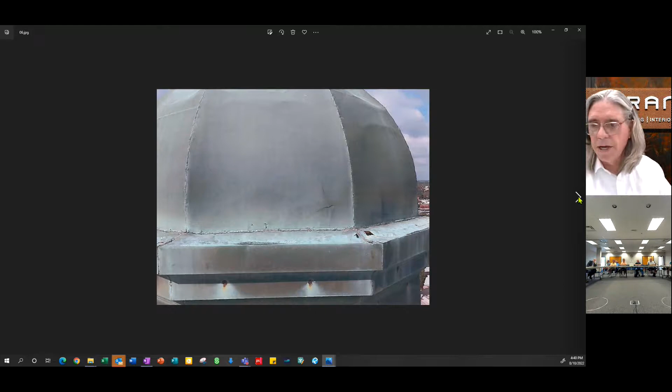So I'd like to start at the top and work our way down on the building. This is at the dome of the lantern on top of the dome. So just below the flagpole, you can see the condition of the copper, how beat up it is. We have tears in the copper, some holes.

We are losing caps over the fasteners, and the fasteners on here are ferrous metal, and so they corrode when exposed, and because they're in contact with the copper. Seams are also starting to pop in a number of locations.

At the base of this dome, you can see how the flagpole is rigged. The cables rub on the dome itself. And then at some point, a stainless steel piece of flashing was applied over the copper to protect it from the rubbing of the cords.

Now, please make note that this building did not have a flagpole when it was originally built. And at some point, the lantern on top of the courthouse was redesigned and replaced and a flagpole added.

Here's some of the accommodations for how the rigging for the flagpole is held in place. It's exposed to the elements. It's been wearing out. They have to tie it off to the railings on the lantern here.

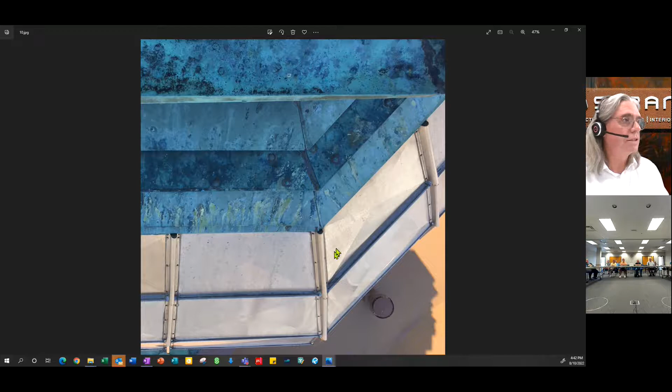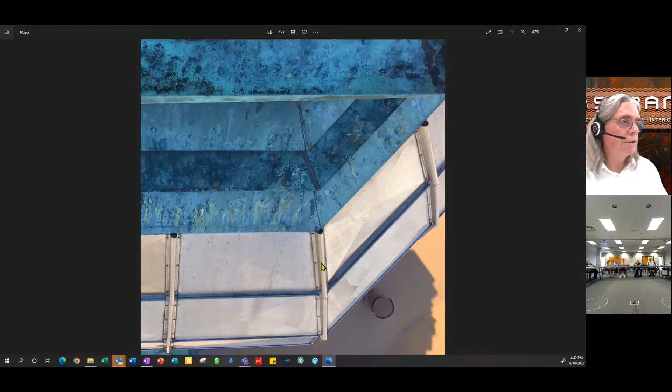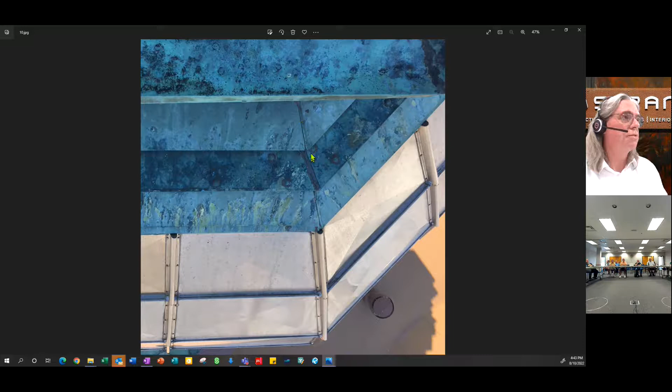Looking down from the lantern onto the stainless steel, you can see the tops of these ribs are open. So any runoff coming through can flow into this. And the attempt is to try and drain it down and out. We can't be positive with that, and you'll see some of the damage going on. We have solder joints that are wearing out and cracking on the copper.

This is a corner piece here at the base of the dome, and you have a flat roof on here that is copper clad. Again, seams are starting to go on here. They're starting to crack, and there's some movement now. This is a replacement for what was the original spheres that were on the courthouse when it was originally designed.

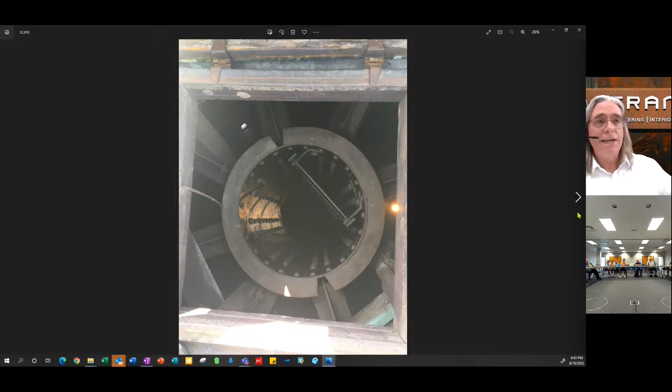I want to take you down into the dome now. So starting up in the lantern, this is what you have to climb down through. You have a ladder that takes you up, but the ladder stops about 2 feet short of the deck. And again, please remember, originally there was no need to get up here. And when they redesigned it and added the flagpole, this became important. This was added probably as an afterthought.

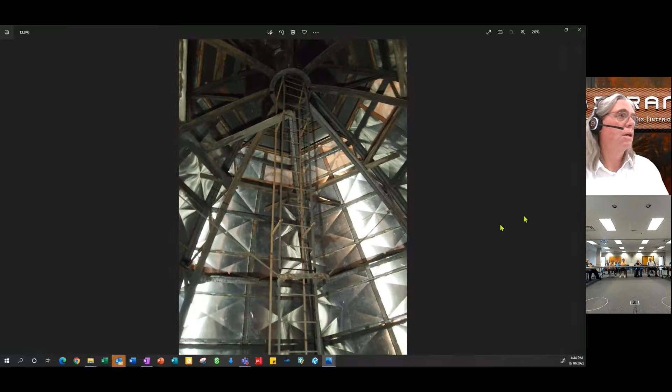The inside of the dome, we were seeing a lot of corrosion going on in here. Now, some of it is definitely attributed to leaks. A lot of it is also attributed to humidity. This is untempered space. And so when you get a breeze coming off the lake, you're going to get a temperature drop. You're going to get condensation occurring on the steel. After 120 years, the steel primer that was originally on here is wearing thin and some corrosion is taking place.

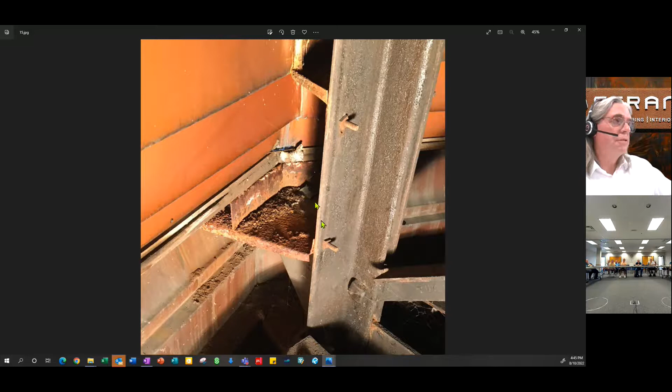Here's at the base of the dome. This is the copper below the stainless steel, and this is some of the armature holding the copper in place. In several locations, this sheet metal has already corroded out. We think this may be from about the 1950s during the repairs and that they had used galvanized steel in here. Regardless, it's corroding and needs to be replaced.

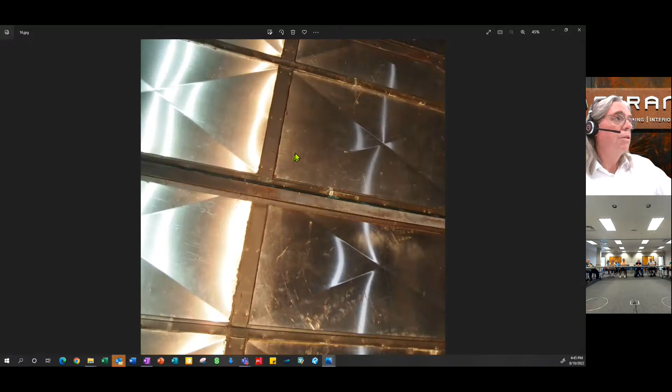This is what the inside of the dome looks like at the stainless steel panels. Originally, each panel represented a large piece of glass. When they removed the glass, they put in the stainless steel and they drilled through all the armature to bolt the stainless steel in place. We've seen instances where there is some leakage, water getting in, whether it is backing up underneath the shingling or if it's coming through at those ribs in between the panels.

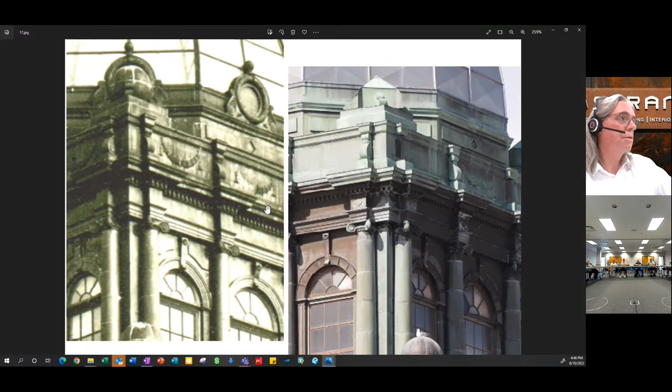I just wanted to quickly show you a comparison. This is approximately 1915, maybe 1920, and this is today. A lot of the ornamentation is gone. This is the sphere on the corner that has been replaced by a small box. There were ornaments on each side of the dome that have been replaced.

I believe that from about this level up is replacement in 1950. It doesn't quite match the construction of what's below. You can also see that a lot of the ornamentation down below has been changed. Here's the original window arches and brackets. They've been swapped out. Again, I think this may have been the result of the 1950 storm damage.

Looking at the columns, you can see that on here, over here, and here, all the seams are beginning to open up. This is all soldered together. This is a natural hook joint, meaning that this piece slips over this piece and they're meant to move. Hence the idea of having a slip joint there. Water doesn't get up into it, but something like this, it's not the same. This should be sealed tight.

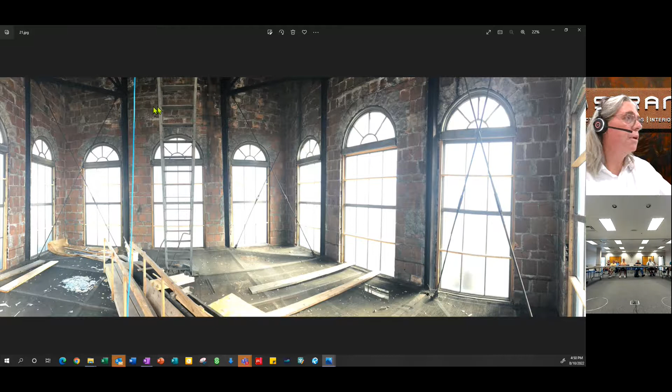There's a lot of efflorescence going on. There is a lot of soot. You can see various repairs have gone on, particularly on the window arches and up towards the top here. This is the ship's ladder going up to the dome. Originally, the dome was open all the way down. When they clad the dome in stainless steel, they also added this floor in the dome. And this floor has a roof on it. It's actually in good shape, but it is about 70 years old now.

Looking up towards the top of the walls is where we start having a lot of concern. Water damage in the past, a lot of efflorescence. Now, this is underneath where the spheres were that were replaced with those copper boxes. So as seams have started to split, water has been getting in, and you can see some efflorescence. Things have been repaired over time. Some of the steel is darker than other pieces because that has been painted over time to keep up the coating.

Over here, this is one of the trusses up in the dome coming down, meeting a column. And this is the condition of it. You can see here that the truss appears fine, but the column itself, which is embedded in the book tile walls, is rusting. Now, we could not get up close to this. I can't tell you how bad the corrosion is. Is it just surface corrosion or is it much worse? But you can see all the water damage that has gone on to the book tile around here.

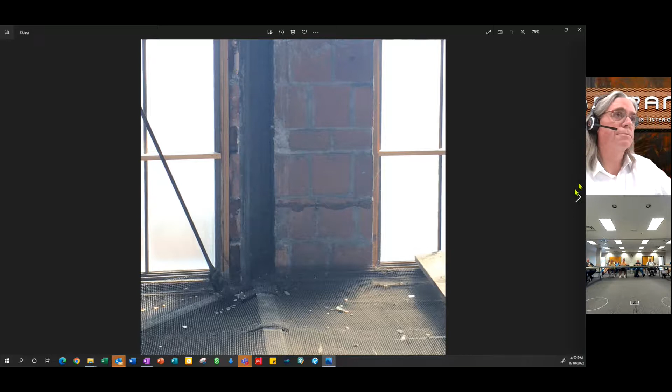As we come down towards the bottom again here, the windows, and you can see additional wood bracing has been added behind the windows to reduce the chance of more sash being broken. But you can also see in here that clay tile over time has either broken out or it was removed when these windows were replaced and 2x4 framing was put in. This is just a close-up of the interior side of the original windows and how they fit in there. And again, you can see the arches have been taken care of over time.

What we have noticed is that a number of the louver fins are stuck in position and really need to be cleaned, fixed, or replaced. Over the years, we've had efflorescence appear on the walls. So these walls are seeing some moisture. And so that's the tower itself.

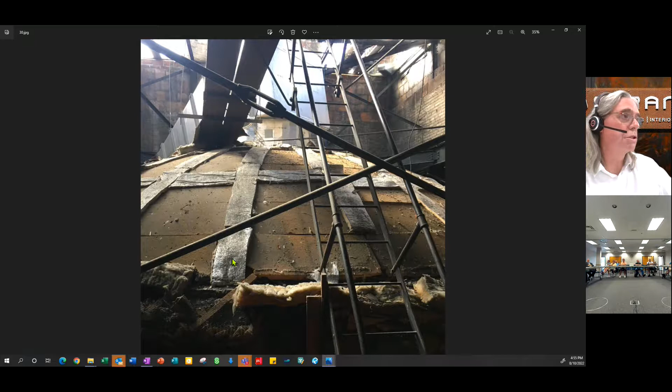This is where the glass would have originally sat. Looked at the condition of the steel. By and large, it's in good condition. However, we did notice there's moisture, whether it is water or humidity coming through. It is damaging the plaster below the ring. You can't really see this from down below. You had to open up a panel to see it. And here's a close-up shot of one right next to the opening. So the plaster is deteriorating due to moisture.

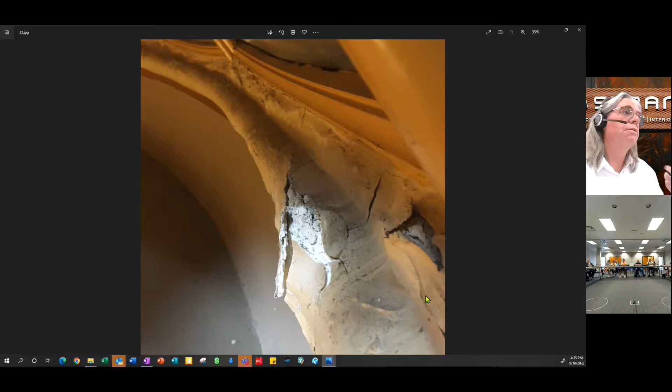Also, when the window replacement was done in the 70s, those of us old enough to remember the energy embargo, at that time it became popular to lower ceilings in buildings so that you did not have to heat or cool as much space. And that's what happened here. The ceilings were dropped. The original transom windows were infilled with a metal panel.

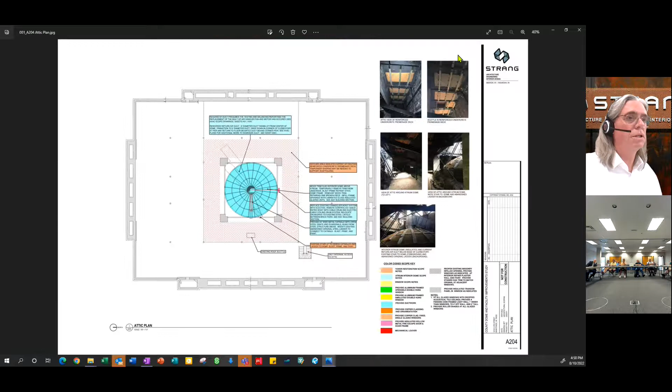What I'd like to show you now is our scope drawings very quickly. What we put together, and this is listed in our report, this is how they developed their estimates. We came in, identified the issues, and we started putting together here's the recommendation, and these are the items you need to do in order to achieve that recommendation.

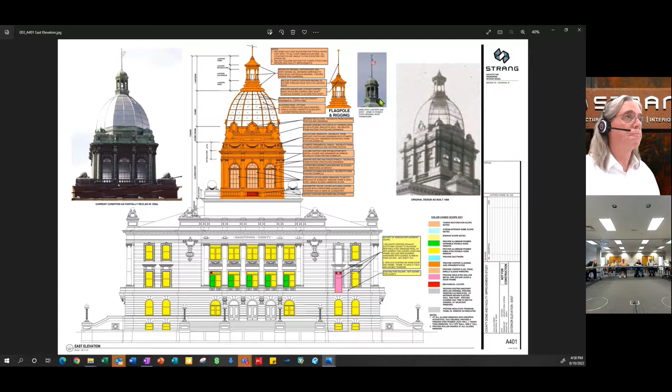For the tower, it was looking at completely recladding, and here's a comparison of the original top and the current top, current lantern up there. The windows, we went through and developed a matrix of how the windows should go back to match what they originally were, with the idea of creating an interior light well on the inside so that you're getting more natural light into the building.

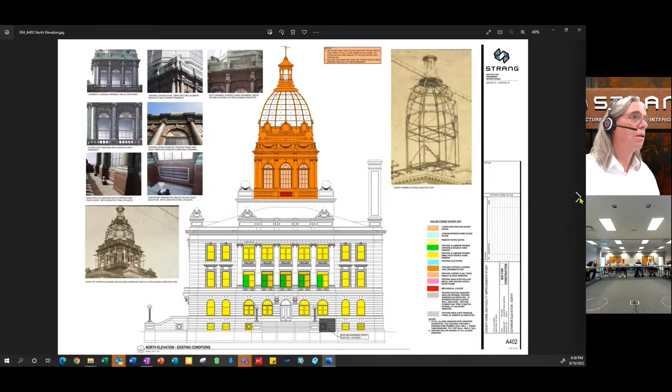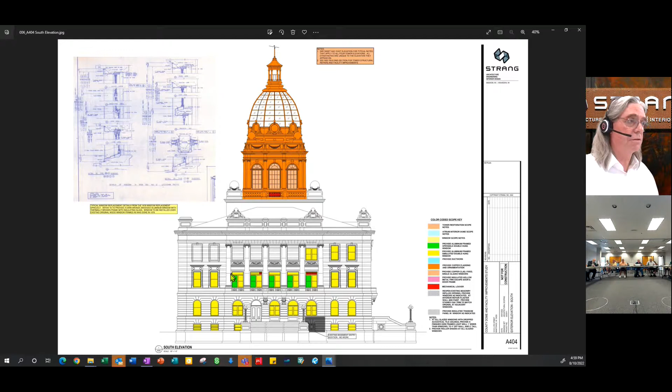We also included details from the window replacement in the 70s there to help inform, this is how the windows were installed. This is what you can expect to find when you take the windows out and replace them. Ironically, the original frames are still in place in here. They're underneath the aluminum.

Then looking at the dome, we came through and recommended, if you were to restore the dome, opening it up and returning the glass, things that would need to be done, such as relocating part of the mechanical system that uses the center grill as a return air. And we threw in an alternate in here. If you're going to go this far, would you consider reactivating the lighting here?

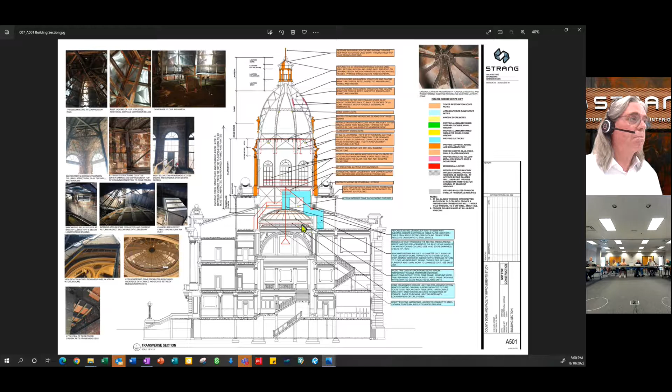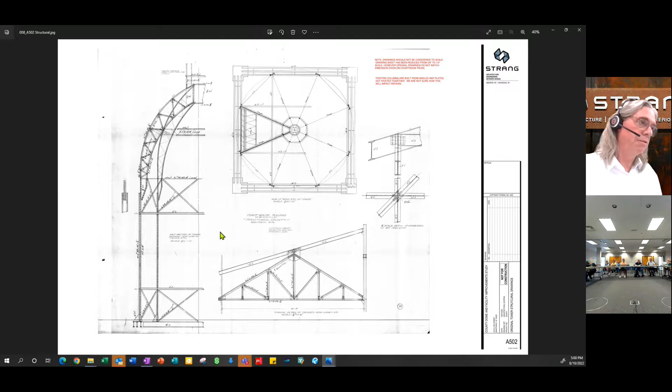And rather than having incandescent lights in porcelain lamps, which is what's there now, to go with a fiber optic system. That means you don't have to send a ladder up to change a lamp in here, because it's a fiber optic cable and the light is actually up in the attic. Again, we were able to consult some of the original construction drawings. We did not have the shop drawings. So this exhibits design intent, not necessarily what was built, but from what we can see, it appears fairly faithful.

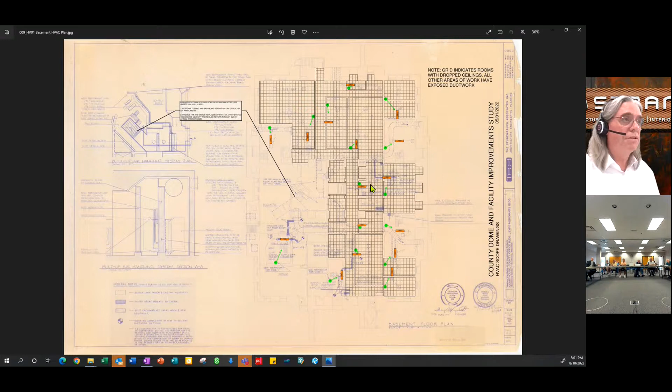Then the two mechanical projects, what we did was we went through, figured out locations and the number of VAV boxes and thermostats that would need to be replaced so that there was an accurate count. Located where we have drop ceilings so that you're looking at either replacing the ceilings or removing a portion of them to do the work and then put the tile back. And we did that for all floors of the building.

Then the final project was looking at the air handling unit in the main courtroom. The current system is at its natural expectancy, and it's time for replacement. It's able to handle 2 different zones. The issue being zone 1 is 1.5 to 2 times the size of all these smaller zones. So it really doesn't work as efficiently as it should. You're always going to be a little too warm or a little too cool in here versus out here.

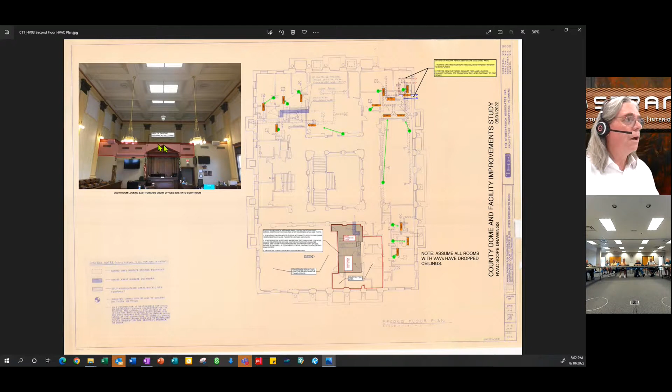And so we made some recommendations of replacing the single unit with 2 units, one that will be subdivided amongst these spaces for each of these zones in the offices, and another one that is solely dedicated to the courtroom, all to be hidden up where the existing are, back behind this wall.

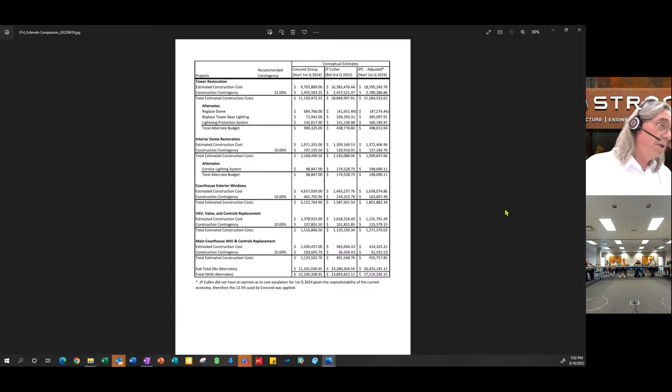So from there, we have the cost estimate, and I won't go into specific numbers, but what I will point out is the columns here. So the first column is Concord Group, again, first quarter 2024. Then JP Cullen, as if we were bidding it and building it this year yet. Then we applied an adjustment to JP Cullen's number for first quarter 2024. That adjustment is the adjustment that the Concord Group used to develop their numbers, and they're projecting a 13.5% inflation rate between now and the first quarter of 2024 if all things remain as they are.

We have some very different numbers on here. And again, the idea was we're looking at it from 2 different points of view. One from a general contractor who's been through it before, who brings the concern about how am I getting to that space? What am I going to find? You're loosely defining this by saying repair it, versus the Concord Group, which is looking at it based on projects they've done. Just, oh, this meets this criteria. This is what you typically find. These are the costs we've been getting this season. And these are the projection rates that we see, the inflation rates that we see coming up.

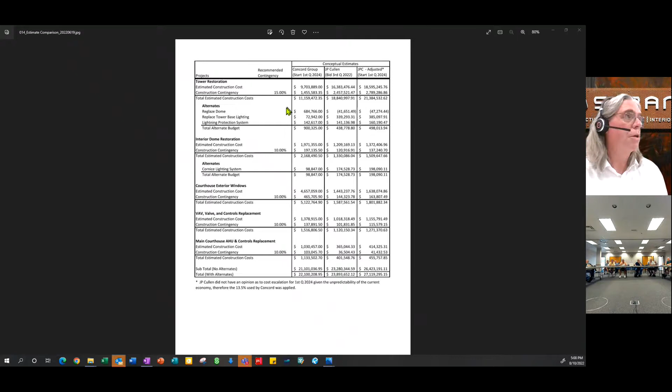Projects of this nature, do they have a typical percent overrun that they have historical information on? Right. What we have done is we've put in a construction contingency. There is a contingency built into these numbers. That is the contractor's individual contingency. It's to cover things they don't know about, because there are no construction drawings or specifications to build off of. They are allowing a contingency in their number. But what we come in with is a construction contingency over the top. And this is for found conditions.

This is for saying, project's been awarded, but we think you need to have 15% on the side to cover items such as, oh, this is worse than was thought, or we opened this up and it doesn't match the opening over here and it has different conditions. So on strict restoration projects, I always recommend a minimum of 15%. General construction is about 10%. When we get to the interior dome restoration, because that's so limited and relatively exposed, we now know how this thing's put together. We only set about a 10% contingency there. And for the windows and the two mechanical projects, we just applied a 10% contingency,

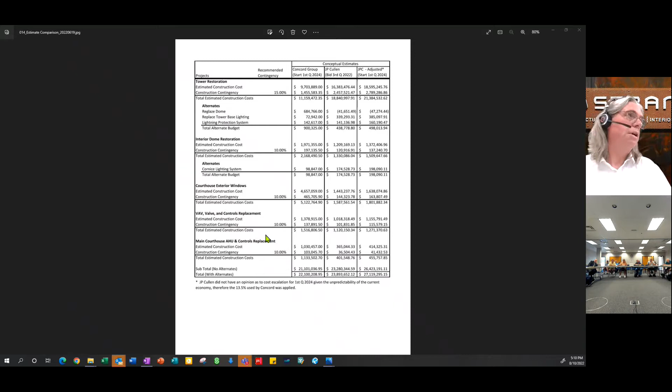the standard 10%. Yeah, I guess my question goes into the companies that are putting these estimates together. Do they have history of projects similar to this? Yes. What the actual guesses were and what the final monetary was? Right. They're using their knowledge, their experience of where things are coming in, to say 10% or 15% contingency. Concord Group originally had a 10%. They just applied a standard 10% contingency to everything. JP Cullen, in talking with them, have the 15% handy, because again, you don't know what you're going to run into.

Supervisor Drill. What was the estimated time frame for the whole project? Okay, this was approached as if these were basically individual projects, because in reality, you can do the two mechanical projects individually, independent of anything else. The window replacement can be done independent of anything else.

There is an advantage to doing the interior dome with the tower. The tower is the one that is going to be the long haul project. That one's going to be a 2-year project. That is 2 construction seasons. You think about the process here of what gets done on that.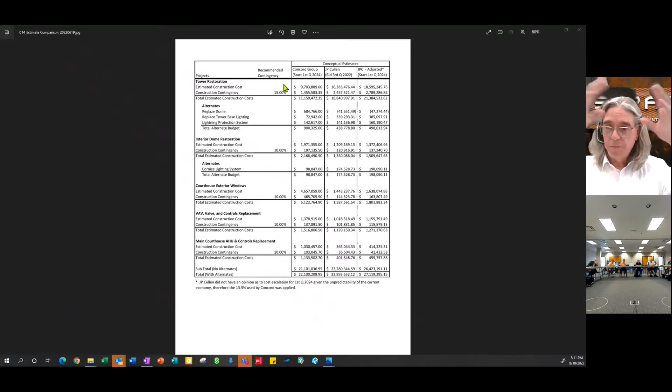First off, you have to peel the copper away, and as you're doing it, you have to document shapes and sizes so that you know how to put stuff back and what size it needs to be. That is then sent off to someone who's going to fabricate the copper. You then come in and you're dealing with the structural repair of the tower itself, the dome, and of the clerestory portion. Then you can come back and start putting the copper back on.

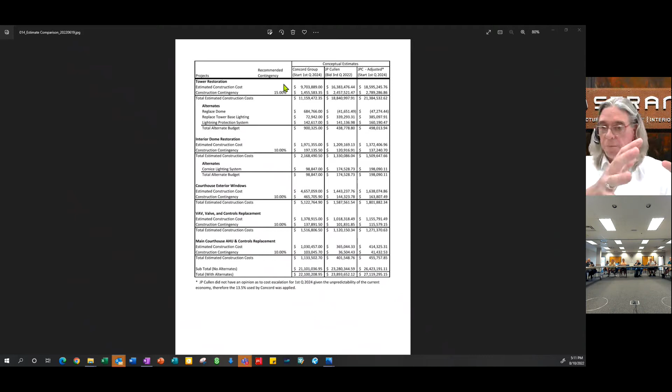Now, even at that point, the question comes in, is it that simple? Do you start by saying, hey, first season, we're going to take on the clerestory because that's supporting the dome. We've noticed some structural concerns there. We want to take care of those first. And so you invest in that, you get a sound foundation for the dome, and then the following season you do the dome. Realistically, you're probably going to tent this whole thing.

And that's something that I believe JP Cullen has in their numbers as they looked at it and said, hey, we're tenting everything off. They even propose encapsulating where the interior dome is, just to avoid, you've got to come in, you've got to blast steel, you have to paint. We need to encapsulate all of this. And one, protect the rest of the building and the users of the building, but two, also protect the work itself.

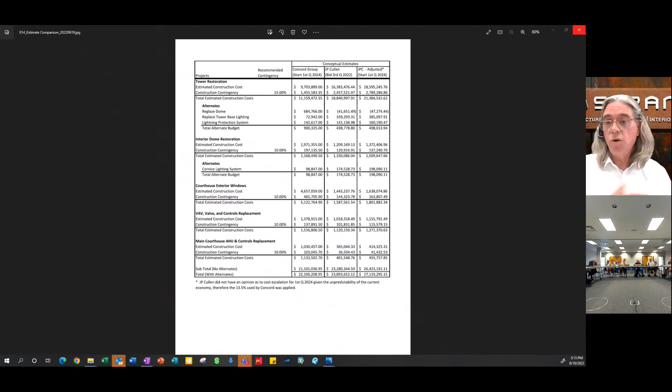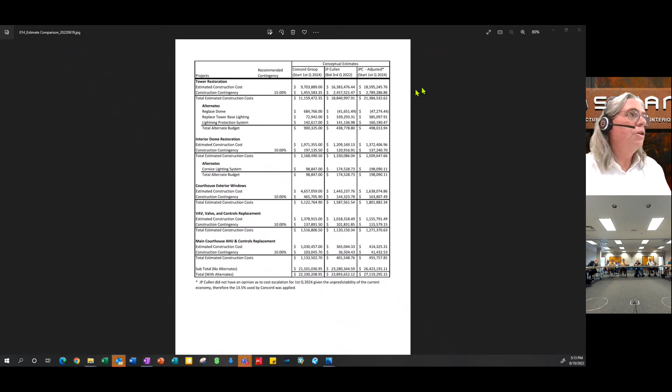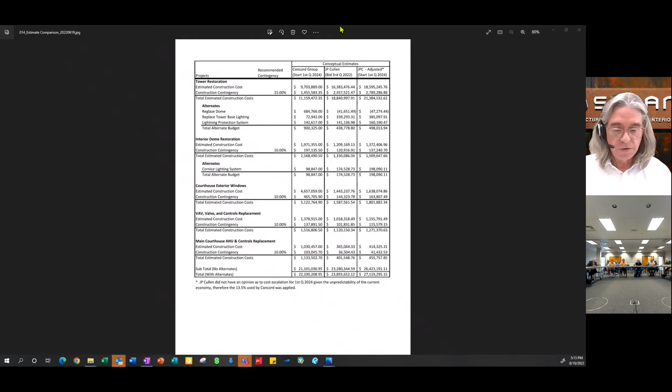Was there ever an idea, or did anybody talk about what it would cost to put the glass back in? Yes. In the alternates here, we approached it as the base price would be to put the copper in. In other words, to make the dome, put all the ornamentation back on the dome, but instead of glass, you're putting in a flat copper panel. This was something talked about with the State Historic Preservation Office. Then we said, as an add alternate, let's look at replacing it with glass.

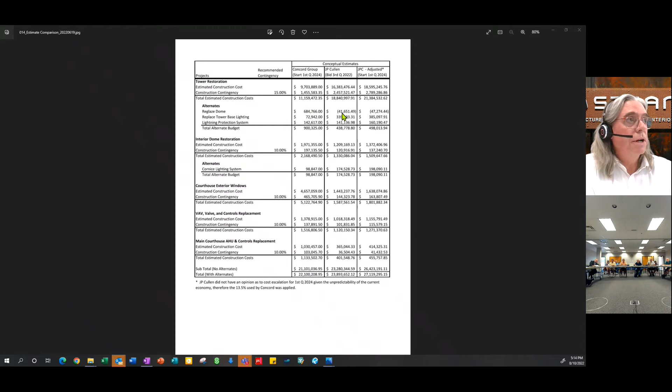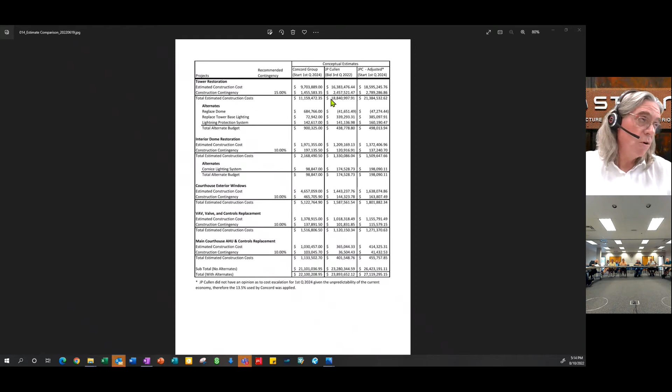And again, you see something interesting coming in here, in that Concord Group is saying almost $700,000 as an add to go to glass. Whereas JP Cullen is saying, with all the things we've got to deal with, it's probably a deduct of $41,000. I'd call it a wash at this point. You've got 2 options here. I think it could still be further explored. There are a number of engineering issues on both accounts that would need to be resolved. And this is part of the normal design and construction documentation process. But Concord Group's looking at 700,000, JP Cullen saying it's a wash.

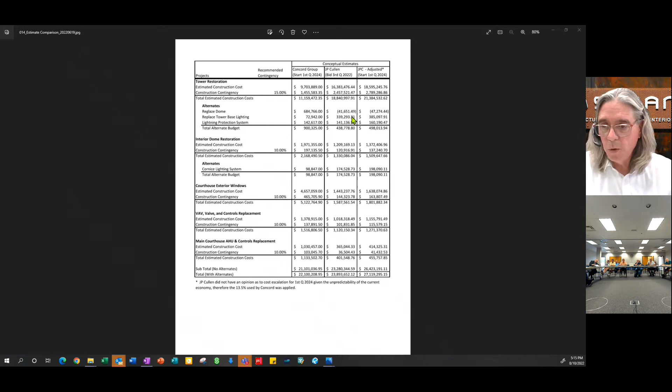And the glass would not be glass to match the original because, one, it wouldn't meet code today. Two, they don't make it anymore. It's called a prismatic glass. But a glass that gives the appearance is available. Any other questions?

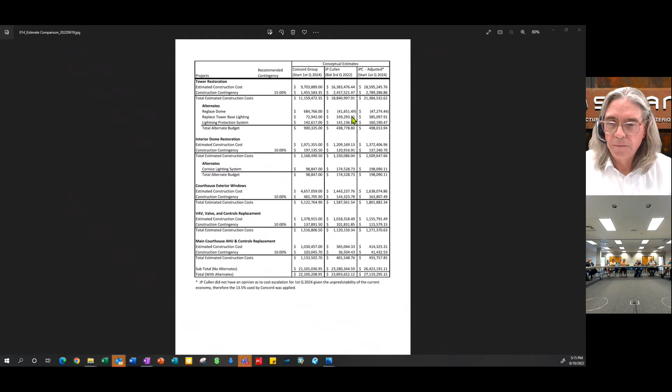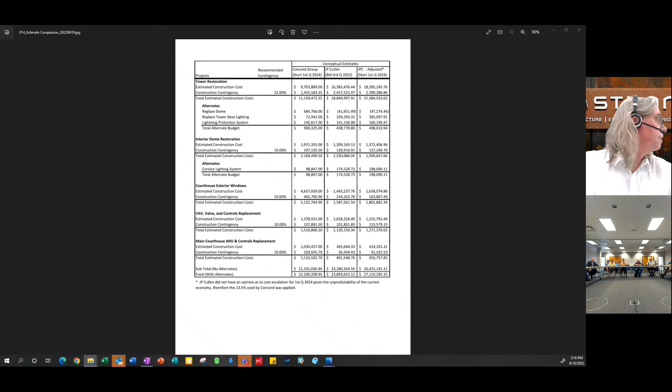So going to glass, what you're going to want to do is specify a style of glass that is going to remain in production to the best of your knowledge. You don't want something super specialized. You want something that can be readily replaced over the years should damage occur. Any other questions?